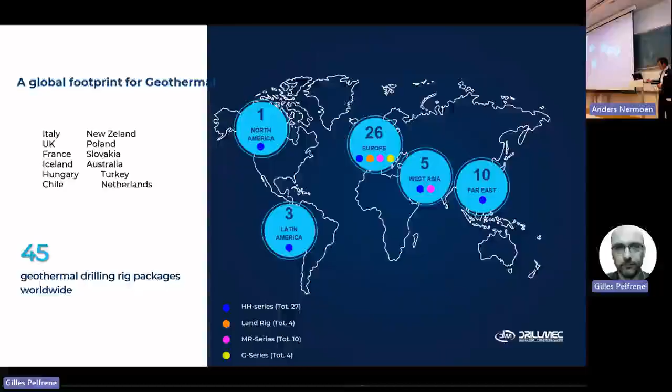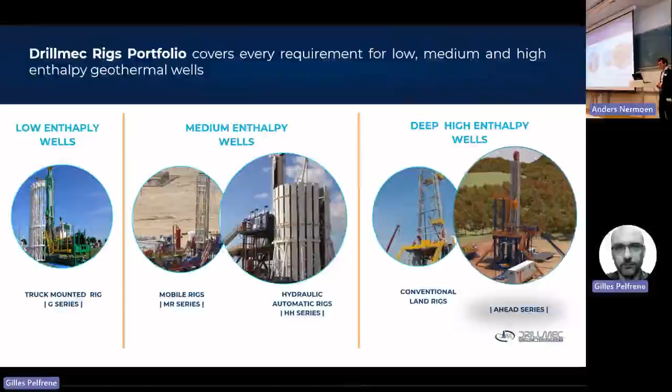The typology of rigs we can provide is wide. The portfolio covers a wide range of applications, starting with low enthalpy wells, where truck-mounted rigs are suggested. For medium enthalpy wells, we can provide mobile rigs, mechanical rigs, named the MR series, but also our main product for geothermal, the HH series. This is the type of rig most employed for geothermal, and we'll see the reasons. Then looking at deep wells, we can provide conventional land rigs up to 3,000 HP of power. But we also have a new series named AHEAD. We'll see the features for this rig.

Looking at geothermal drilling, this very interesting presentation regarding drilling in general, and also geothermal drilling, is facing many challenges, very similar to oil and gas drilling. So if you look at the challenges, first we often have to drill wells in remote sites, and we have to have a limited footprint for the rigs. So the solution for Drillmec is to deliver drilling rigs characterized by a fast-moving solution, and also very compact, to reduce the footprint of our rigs.

Then looking at the well project, in general the geothermal wells are characterized by high deviation, extended reach. Many of them are multilateral wells, and of course we have high temperature at the bottom, and possibly also high pressure. Regarding this, Drillmec developed a new technology named HoD, heart of drilling. This is the commercial name, but it's a continuous circulation system to maintain mud circulation always active during drilling. Then we'll see the features.

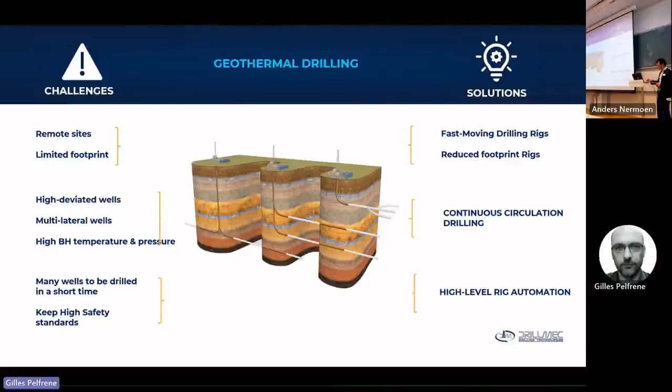Okay, so the main topics of the presentation are first that we would like to present our HH series, a typology of rigs largely employed for geothermal, and then the continuous circulation system.

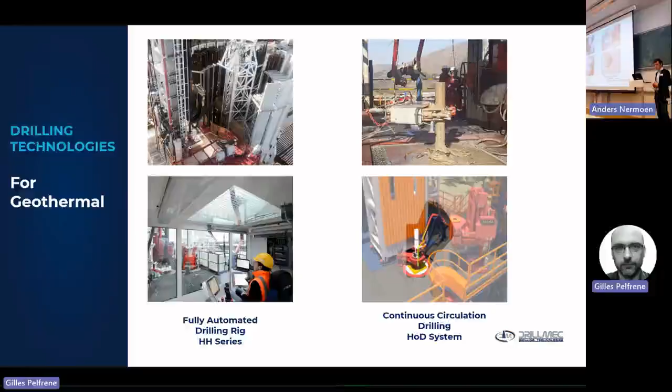Starting from the HH series, you can see one typical picture of an HH rig on the right part of the slide. This rig is characterized by fast moving. You can see that the mast is telescopic, not a conventional mast, so we are not using drawworks in order to put the pipe into the well. This is a hydraulic telescopic mast. The top drive is put up and down with this kind of antenna mast, and the whole rig is designed to be moved in a fast way. If you compare a conventional rig to a comparable HH rig, the number of loads for the HH rig is 50% compared to the conventional rig.

The footprint is highly reduced compared to a conventional one. This small footprint and compact design also helps with the emissions to build up the rig, because we have less manufacturing process, so it's faster, and if we look at the moving, we reduce emissions because we have less.

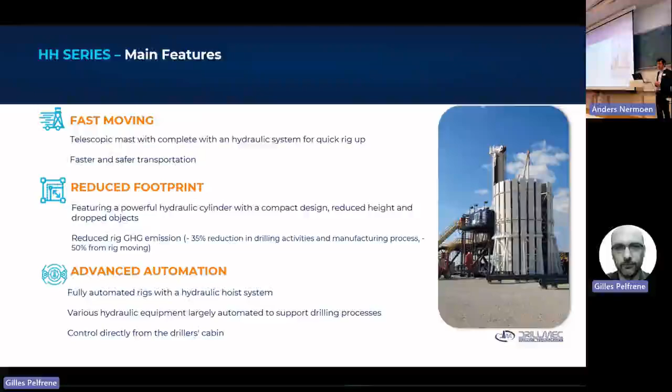The main feature is the advanced automation. This rig was born as a typology 25 years ago, the first HH rig in Drillmec, and was already automated. The aim from the beginning was to avoid people on the floor during drilling operations, tripping also. So there are many handling systems in the rig to avoid people during pipe handling operations on the rig floor, and everything is controlled by the driller from the driller cabin.

This is a typical example of how we can move an HH rig. We are in Tuscany here. It was not easy to move this kind of mast on those roads, as you can see, but we used a trailer with 8 steering axes in order to move it, especially designed for our customer in this case.

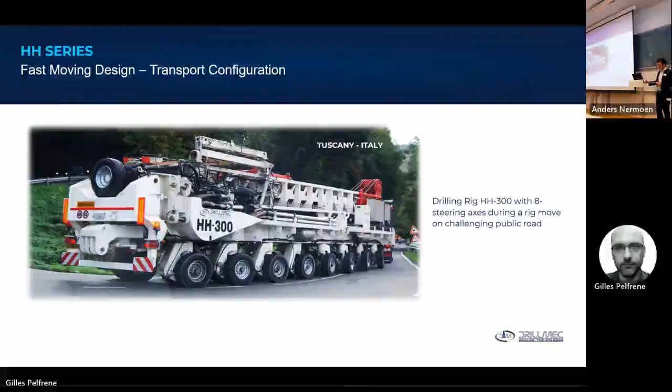As you can see, the footprint, we have a comparison here between the conventional footprint and the hydraulic HH series footprint, and it's 50% in terms of area compared to the conventional rig.

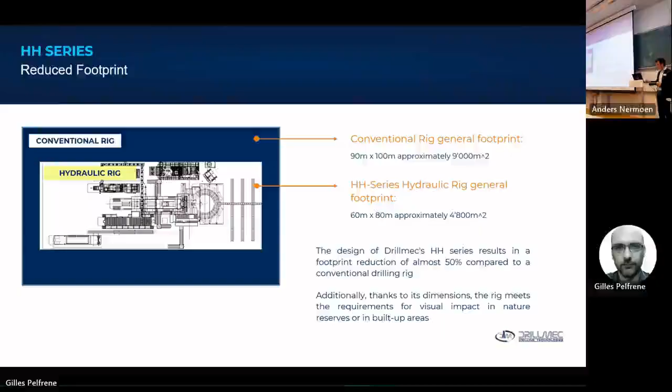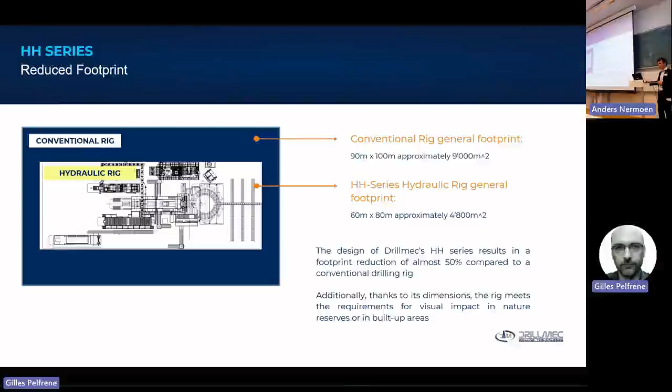Also, another important feature is that the visual impact of the rig compared to a conventional one is highly reduced, because the mast is low compared to the conventional one. That's why this kind of rig is also often employed in urban areas. Also the noise is another important advantage, it's reduced compared to conventional rigs.

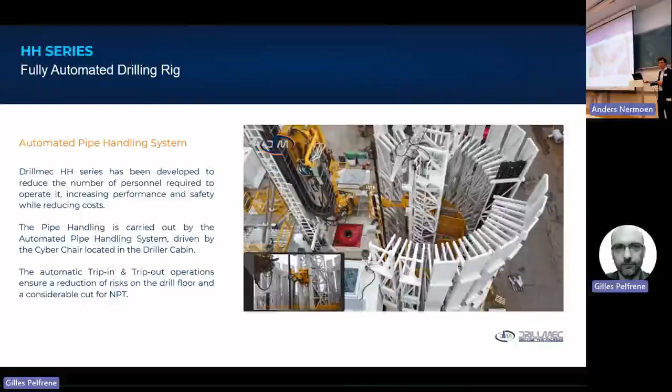Okay, now I would like to show you this video. I didn't remember the music, sorry, but it's good.

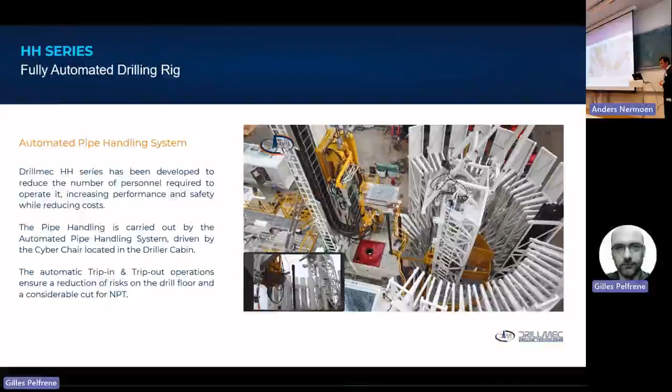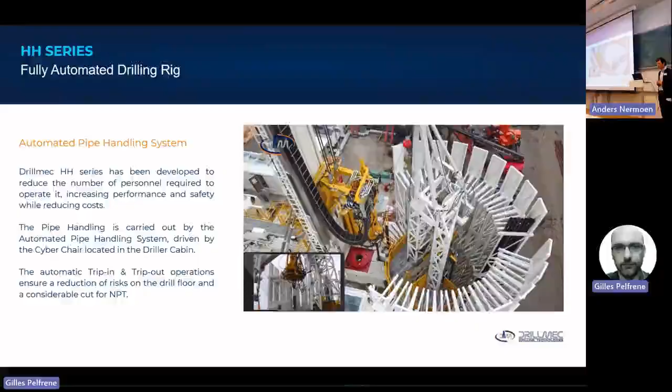Now we are looking at a typical tripping operation that is 100% automated on the HH3. We have the rack for the pipes with a central handler that is putting the pipes into the mouse hole, and then the top drive is tilting in order to pick up the stand from the mouse hole.

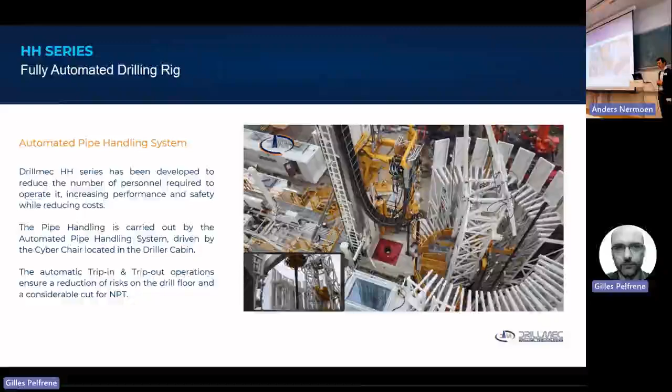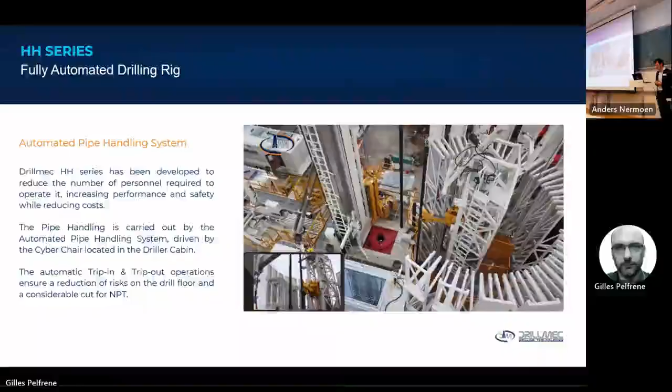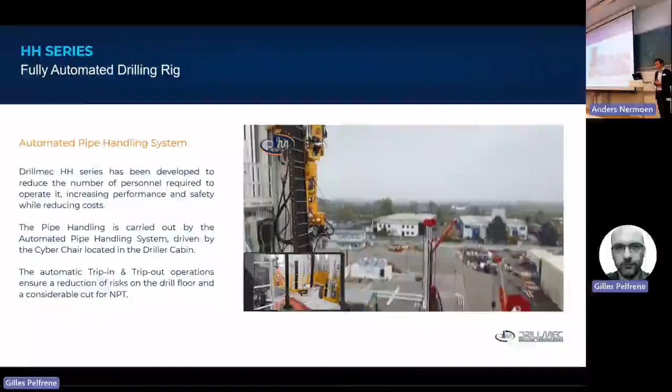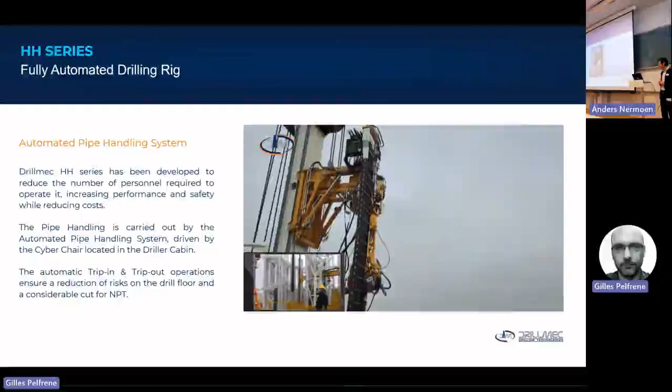The rig can perform trip in and trip out from the well. This helps a lot to reduce the risk on the rig floor, because we don't have people working in that dangerous area. And this was from the beginning, we studied this kind of rig like 20 years ago.

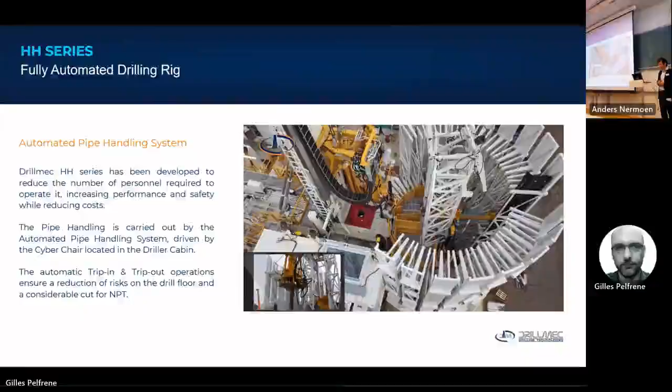The rig is fantastic, so you can see people, but usually there is no people in the drilling. No, it's important.

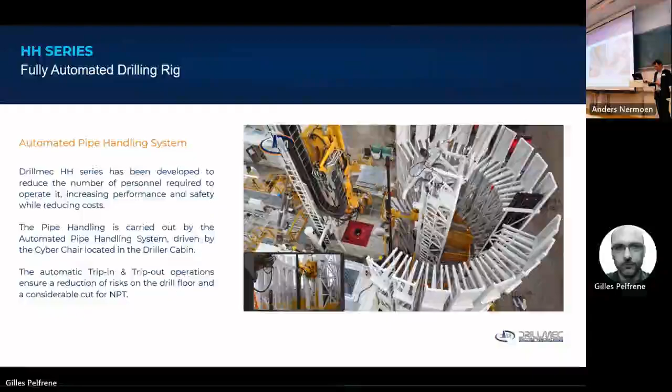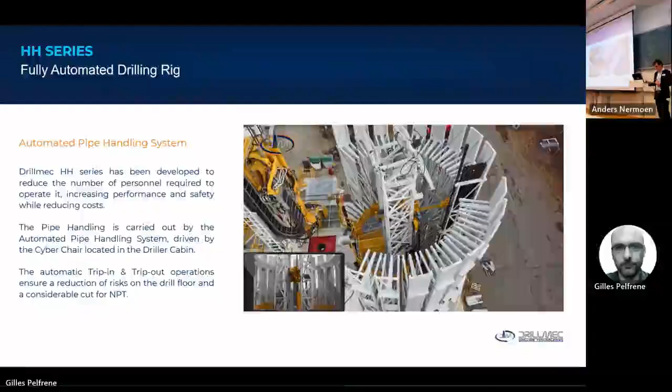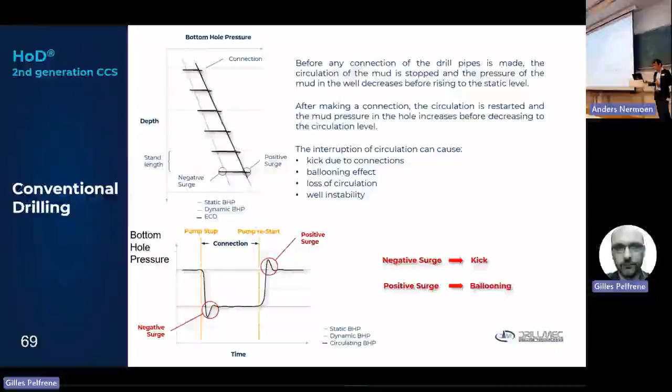Now we switch to the second topic of the presentation, regarding continuous circulation drilling versus conventional drilling. As most of you know, conventional drilling is based on connections on the rig floor. Every time we need to add a pipe to the drill string, we need to pick up the pipe from the rack, and then stop the circulation of the drilling fluid, in general drilling mud, in order to add the new pipe.

And this can give many problems to the drilling operations. That's the reason why usually we see people in the videos on the rig floor always trying to make the connection faster and faster, and this is not safe.

The reason is that they are struggling with the well in that moment, because there is a risk in stopping the circulation of the mud during drilling, since you risk overcoming the two lines that characterize every well: the pore pressure and the fracture pressure.

Every time we stop the circulation, we create a discontinuity, not on the surface, but into the well. This can potentially create a negative surge when we stop the pump, overcoming the mud weight—that's if we're talking about overbalance drilling. This negative surge can potentially give a kick, and this is something that must be avoided.

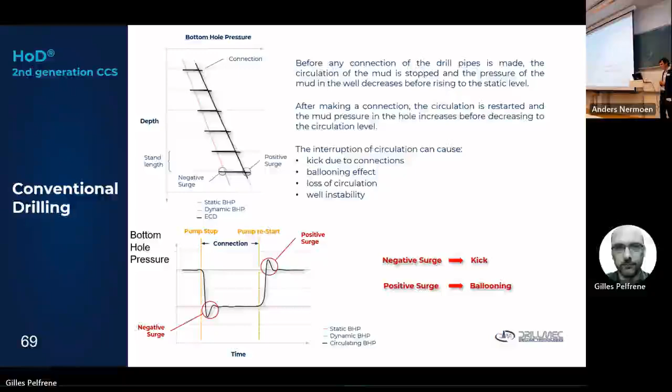So in general, what we want during drilling is to maintain the line—sorry, the black line that was in the middle between the pore and fracture lines. The aim is to maintain this line in the middle, always active, without any interruption of the circulation. This is the ideal situation during drilling.

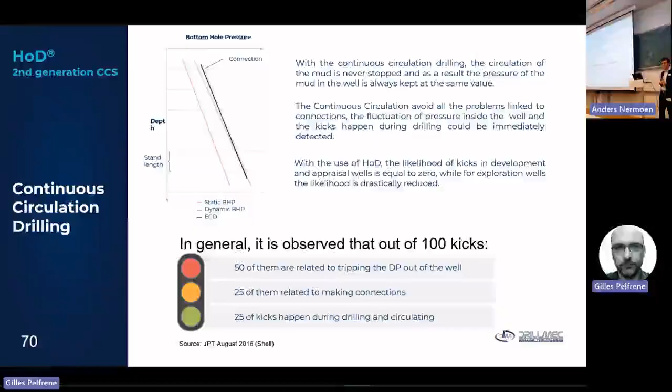To do that, Drillmec developed a system named HoD, Continuous Circulation System. It's a system based on the use of subs. These subs must be pre-mounted on the top of each stand in the rack.

So you need to prepare one drilling phase, pre-mounting these special subs on the top of each stand, ready to drill the phase. The concept is when you drill the stand and reach the rig floor with the top drive, having finished drilling one stand, theoretically you must interrupt circulation to pick up another stand from the rack.

With this system you can avoid that, because with the sub pre-mounted on top of each stand, you switch the circulation from the top drive to another line. We put a connector called a clamp on the side port of the sub, then switch the circulation from the top drive to the side port. Then we can disconnect the top drive and pick up another stand, but the circulation of the mud remains active in the well.

When we have the new stand on top of the drill string, we can re-switch the circulation again to the top drive and disconnect the clamp. So it's like a sort of pit stop, happening on the rig floor.

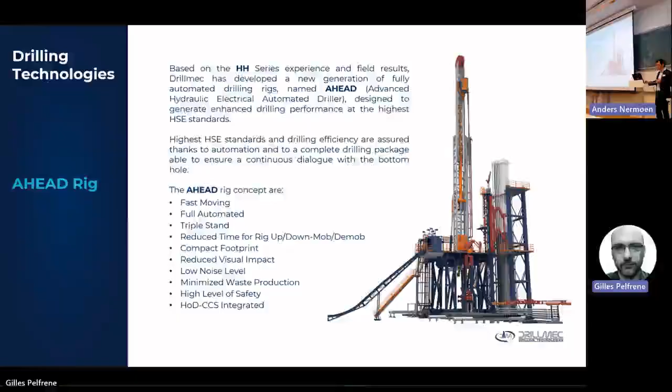So we can prepare the stands even during drilling, managing all these pipe operations during the drilling operation, which saves time. We also include the continuous circulation system as part of the rig.

We have a handler that moves the clamp to the sub during the connection. The continuous circulation system, in this case, is one piece of equipment among the others we have on the rig. So this is our idea of what could be the best solution for the geothermal field in the future.

That's it. Yes. Thank you, Alberto. Questions?

This circulation setup here - yes, you must put one sub on each stand that you need to use during the drilling phase, if you want to drill with continuous circulation. So the phase you studied before, you need to study in the well project, of course.

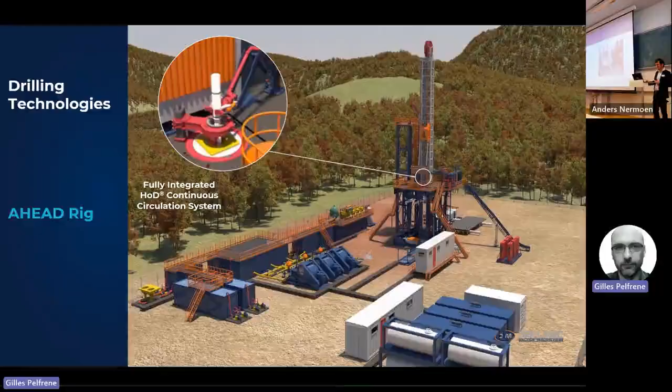Yes, it's here. So it's each three pipes, right? One stand is three pipes. Yes, on one side, correct. Yes, usually it's three. In offshore it could also be four.

But where do you connect here? See that? Okay, this is a connection on the rig floor with the continuous circulation. Now the sub is connected to the clamp, and we are circulating from the clamp now.

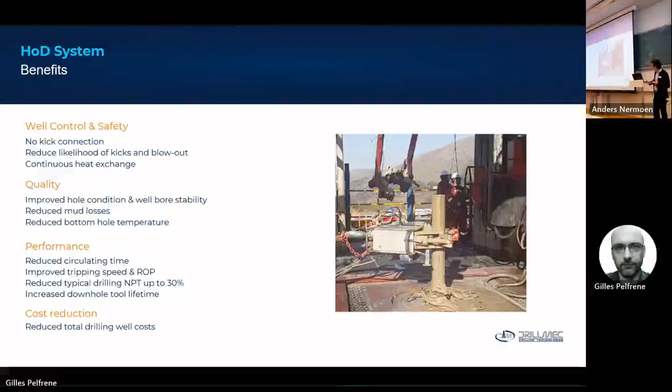Okay, I see, but there's a hole there then. A hole is on the side of the sub because we need to pass with the mud, but the clamp is automated now. It's an automated device and is open on one side port, on the side part of the sub, basically a cap. But you cannot see it because it's inside. No, from outside you can see it.

But anyway, inside is opening a cap, and then the circulation is switched. Inside the sub we have one system of valves that is closing one side, top drive in this case, and is opening the side port. The cap that the clamp is opening acts like a second barrier. So we have cap, valve, and then the hole, the drill string hole.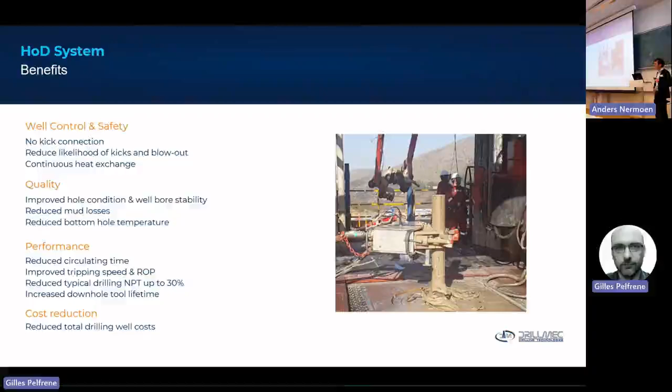How does it affect the tripping time? Also it's very affecting the tripping time, because when you need to put the drill pipes in and also take them out from the well, it's a risk - if you're too fast, you risk creating some problem with a kick or something like that from the bottom. So in general, this system is very simple as a concept, but is helping on many aspects of the drilling of a well.

Yeah, it's a simple concept, but it's not so easy to create this set and to make it work, because we are always acting with something with high pressure. So this is the main thing - we look from the beginning to the safety of the system, that must be the first feature of it.

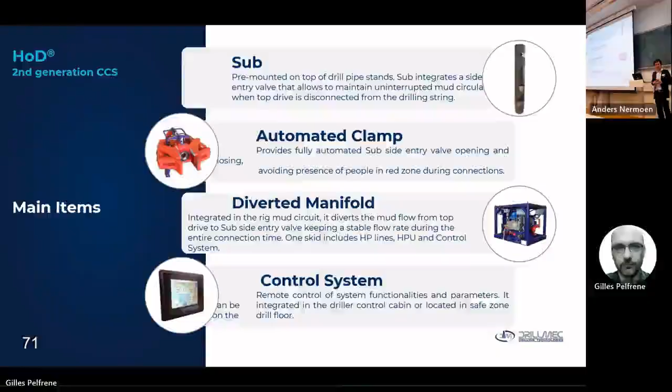What is the adoption of this continuous circulation system right now in your operations in geothermal? Because as you said, it affects the temperature of the well, and I guess this is very important, particularly in Italy, where you have high enthalpy wells. That's a very good question.

It's not so widespread as we want. First we have very good feedback from oil and gas, especially in offshore operations where the costs are very high, so companies start to understand the importance of this kind of technology in order to prevent any accident or negative events on the rigs. For the geothermal experience, we need to reduce this know-how gap. I think the problems are the same or very similar, but sometimes this is seen like a cost - it's not a cost, it's helping to reduce cost. So we need to close that gap and work on that.

Apart from that, in Italy we had an experience with an energy company in Tuscany. They tried this system, it works fine with the well, but again there is this barrier - in general, also in oil and gas, there is a sort of resistance looking at new technologies. It's like this. It's even worse for geothermal because they need to close the gap also with oil and gas, so there is more resistance. But I think it's just a matter of time, because the problems are very similar sometimes between geothermal and oil and gas.

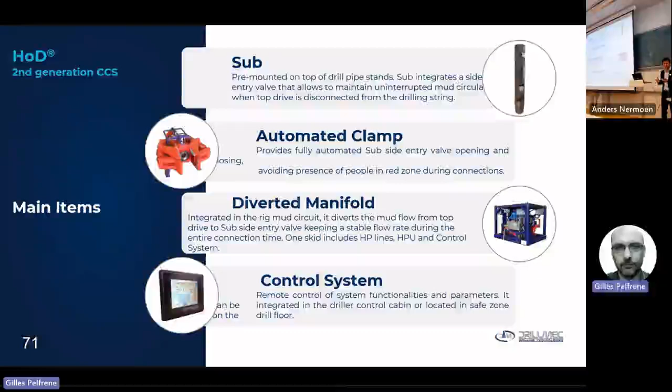And above 200 degrees Celsius, I guess it would be very difficult to drill a well with all the electronics. Yes, absolutely, the more technology you use at the bottom, the more the system is helping, because one of the aims of circulation is also to maintain the equipment in good condition with the temperature.

Yeah, I don't know, it depends on the answer. Sorry, I'm going - yes, no, I was just curious because you mentioned you have these challenges downhole with regards to tripping and so on. So how do you take that into consideration?

Is it part of your system, or is it more a manual monitoring of what is happening downhole? It's not part of our system, even if we are working also on monitoring, especially mud monitoring conditions, like some parameters coming from the well. But for sure it's helping whoever is monitoring - not us, but in general the service companies providing logging or information coming from the well - because the circulation is also keeping the link to the bottom active. So you receive information in a continuous way from the bottom, that's another advantage.